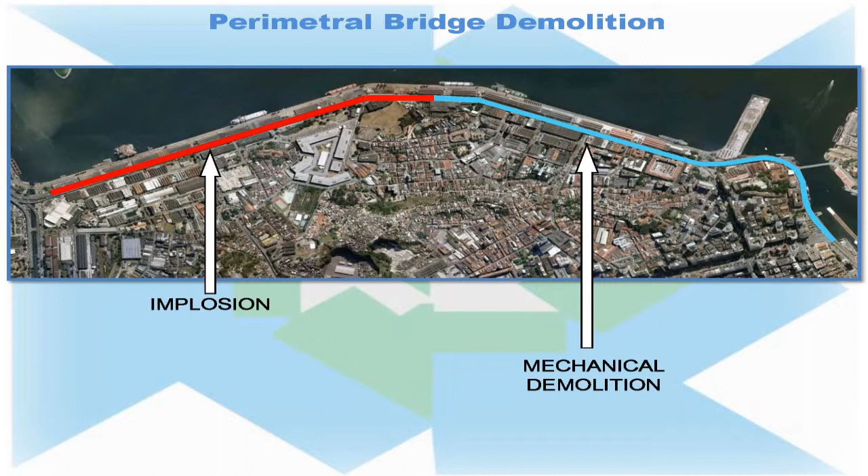This is the implosion. It's a 5-kilometer bridge, of which 2 kilometers will be imploded, and the rest will be demolished by equipment.

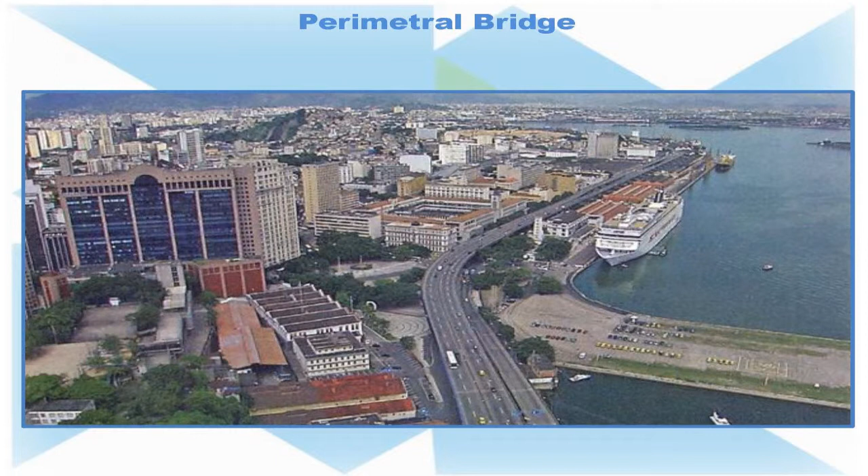It's very close to downtown Rio de Janeiro. It's also a place where ships arrive in Rio, so the mayor wants to change that view because it's a very ugly part of the city.

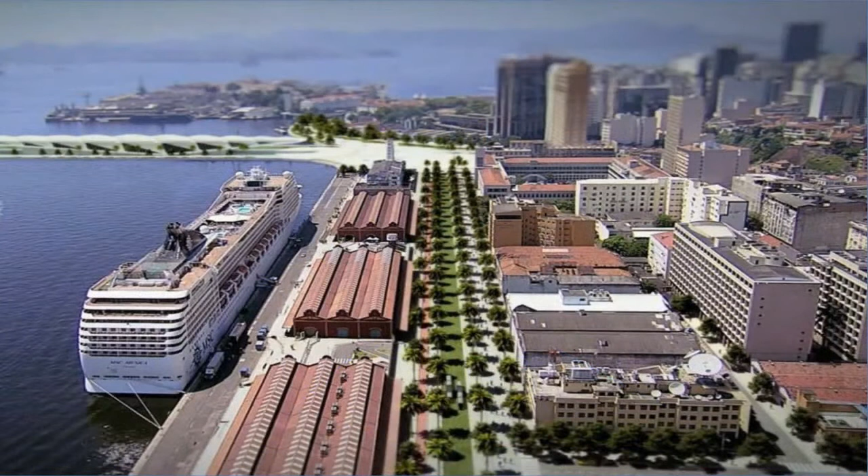This is how it's going to look like afterwards. A very clean area with a lot of spots to walk around, and restaurants and everything. So it's going to be a very nice place in the city.

The numbers of this implosion: almost 2 kilometers of implosion. We have to detonate 47 columns. We also have 384 pieces of steel beams that must be preserved. We signed a contract requiring us to preserve at least 90% of these steel beams.

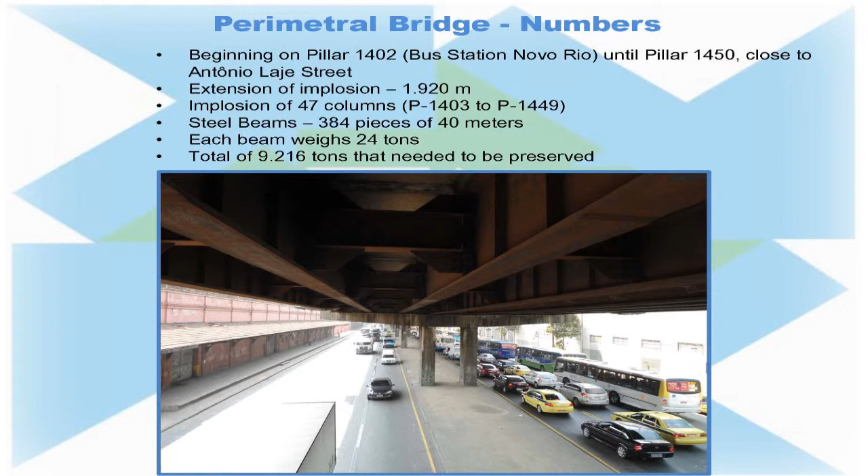It all began in December 2010 when we offered our client a price for the mechanical demolition of the whole thing. Then in May of last year, we came back saying it was possible to implode this structure, at least part of it, with a lower price than we offered, and also with a gain of time, because the traffic is still passing above and below the bridge.

So we're going to close the traffic only 2 weeks, actually 10 days, before the implosion. Because with a mechanical demolition, this whole bridge would have had to be closed already.

So they liked the idea. They said, it's a good idea, but how can we sell that idea to the mayor? Making an implosion in the middle of the city - it's not possible to just say that you're going to implode and that's it.

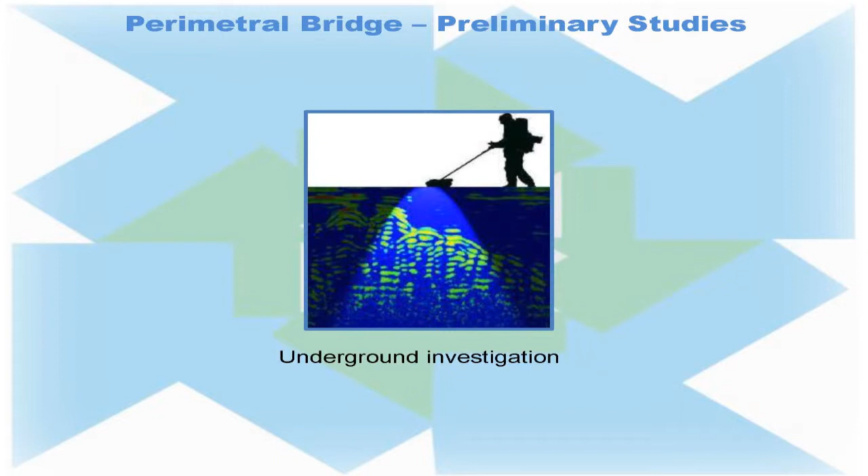So we made a study together with ASI to prove to the mayor and also our client that the implosion was possible. We began with underground investigation, because there are a lot of pipes and tubes with gas, water, and energy passing under this bridge, so we had to keep them safe and untouched.

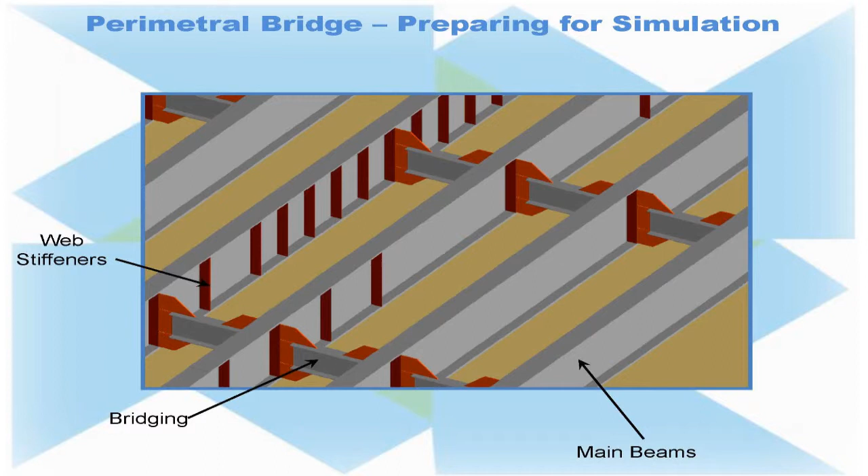After that, we sent ASI all the information they needed, such as the beams, bridging, all the concrete, the size of the columns. And they designed for us 5 simulations, 5 different scenarios at first.

With the 5th scenario, we agreed we could show the mayor and our client that it was possible to make this implosion.

Our first scenario was with no cushion material at all, just to see what happened. And we had, of course, a lot of damage in all the beams - 47% damage. That was the percentage of damage in the beams.

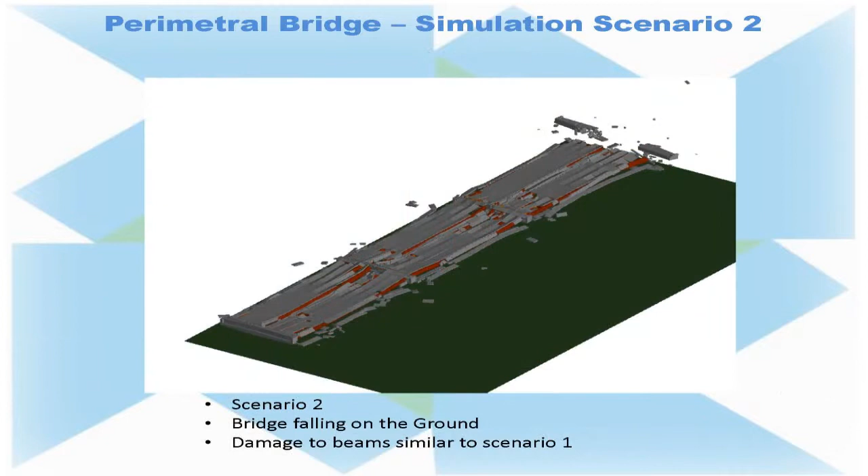The second scenario: we created a delay between the columns of half a second, just to see if that kind of delay would minimize the damage in the beams. But the damage was basically the same - we had also 47% damage in the beams.

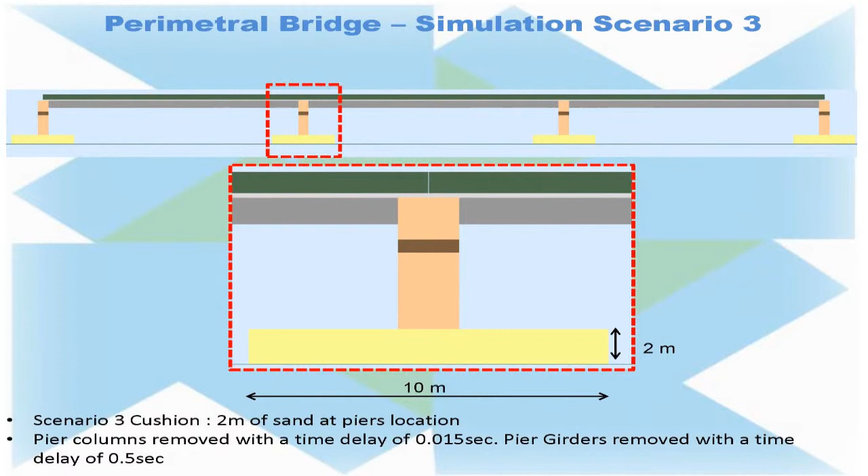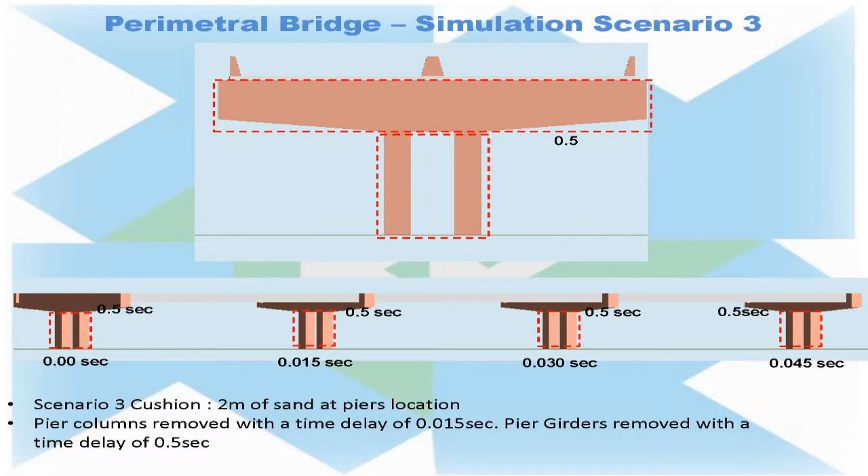Our third scenario: we created a cushion of sand, 2 meters high by 10 meters wide, placed under every column. We also made a delay of 15 milliseconds between the columns, and 0.5 seconds detonation of the concrete beam located above this column.

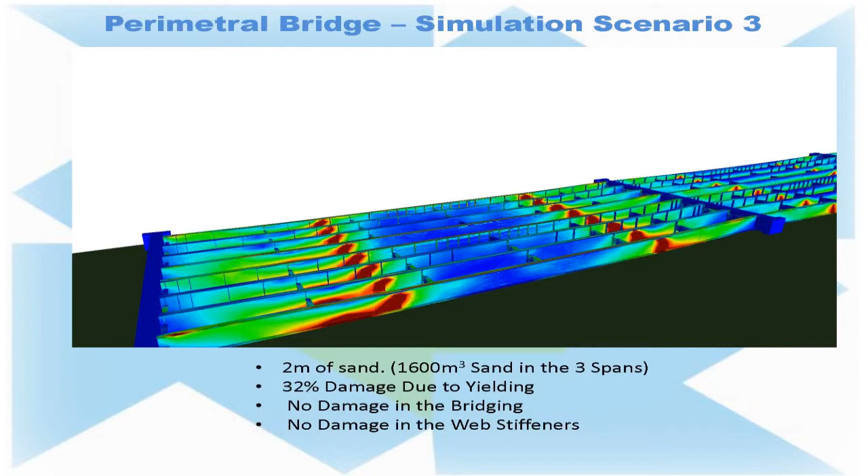We had partial damage due to yielding of steel, not tearing, but still it's damage - doesn't work. We had 32% damage in this kind. Go back.

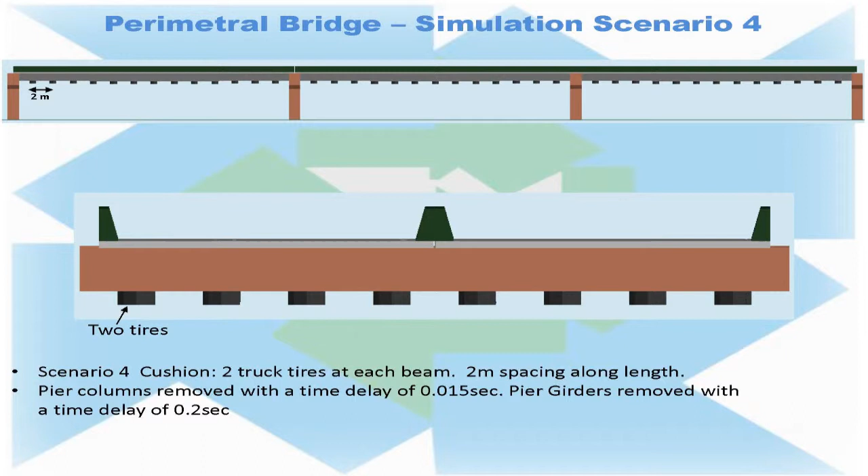The fourth scenario: we used 2 truck tires with 1 meter diameter, with a distance of 2 meters from each other, placed under each beam. We have 8 beams like that between each span, so there's a lot of tires placed on top.

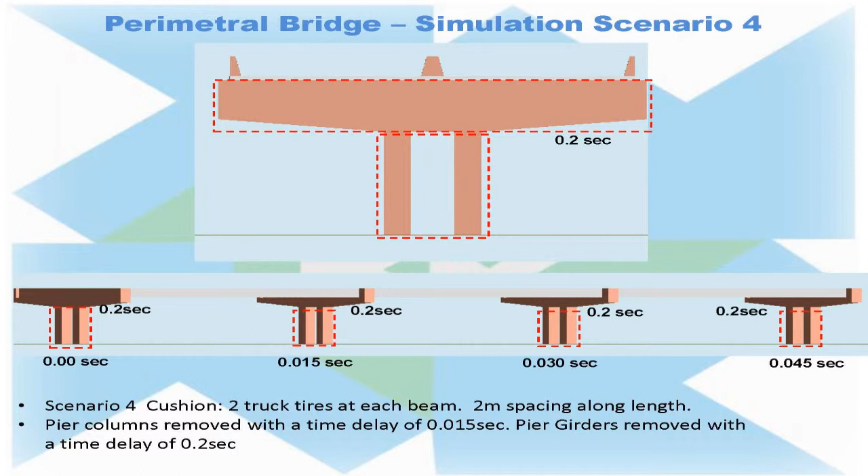We also created a delay of 15 milliseconds between each column, and 0.2 seconds between the columns and the concrete beam located above. The result was 23% damage in the beams. We're getting better, but it's not enough.

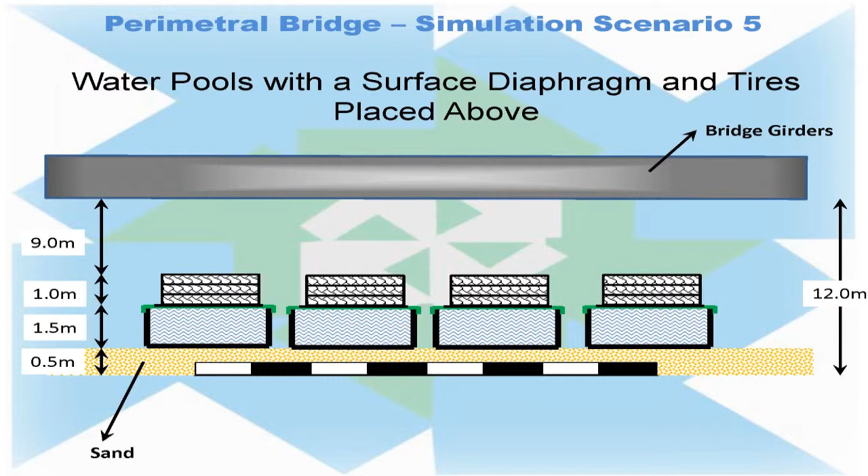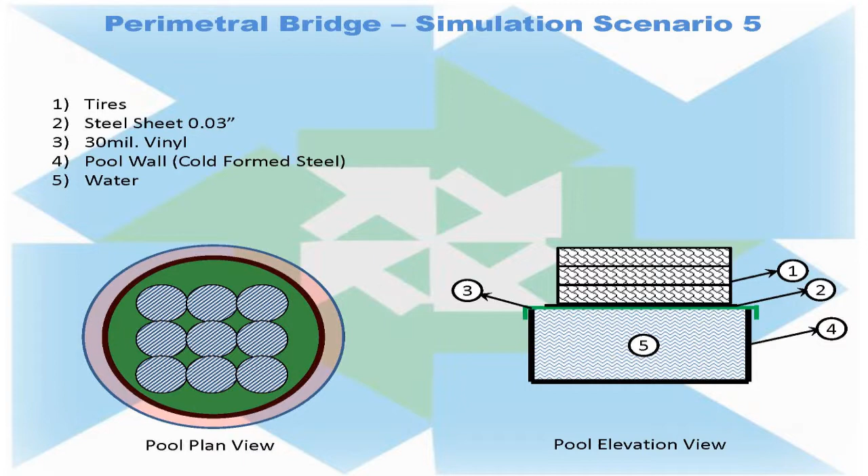So, together with ASI, we made the solution of truck tires plus water tanks working together - these are how the tires are placed into this water tank. We create 2 different energies: the first to absorb the impact, and the water to transform the vertical energy into horizontal energy. So we got the result: less than 10% damage.

With that, we could show the mayor that it's okay, we are ready to implode. This is the final simulation - the simulation of this scenario.

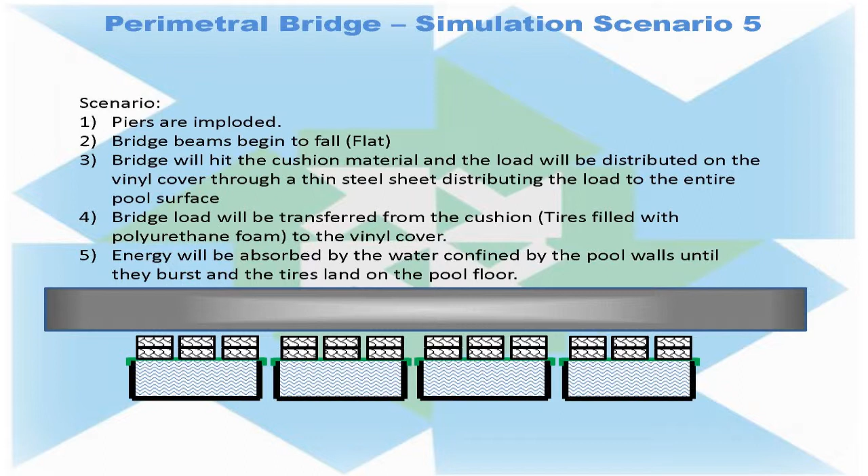This is the scenario that we showed the mayor. We also made a report with everything - all the calculations and all the necessary information about the simulation - and he agreed with that.

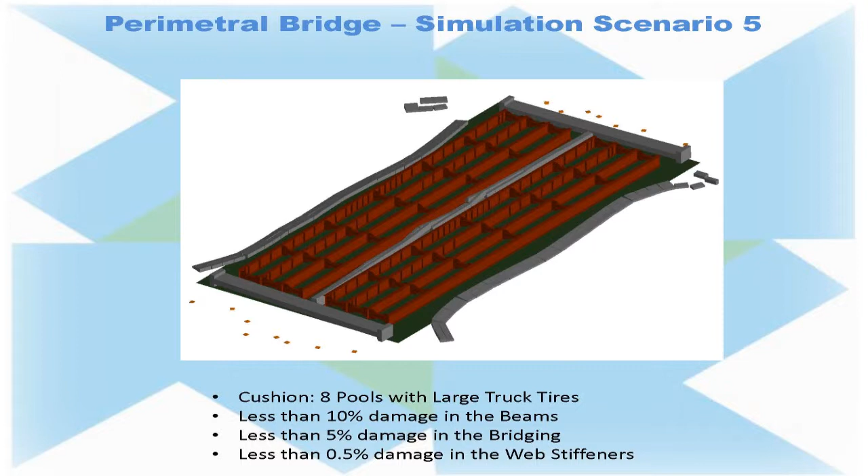So in this simulation, you only see the beams falling. This is the index summary of all these 5 scenarios that we made.

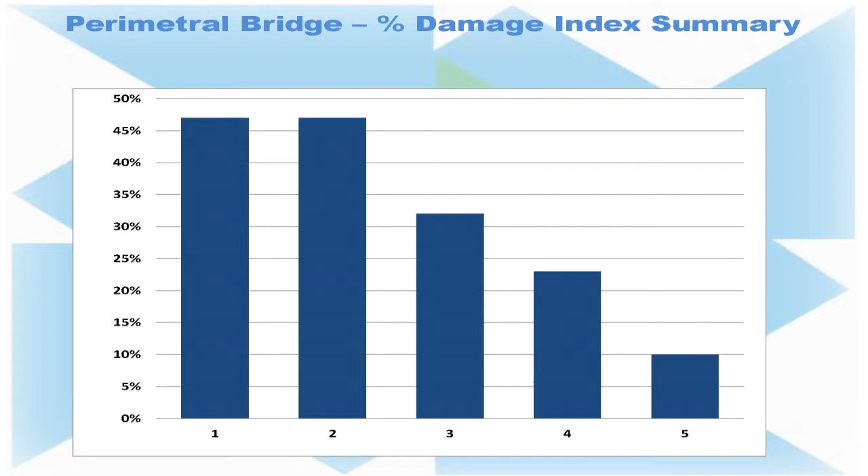After that, we had more than 35 scenarios, testing different kinds of materials, some on top, some placed on the bottom, and that one was the final scenario. This one we're going to use now on this implosion that's about to happen.

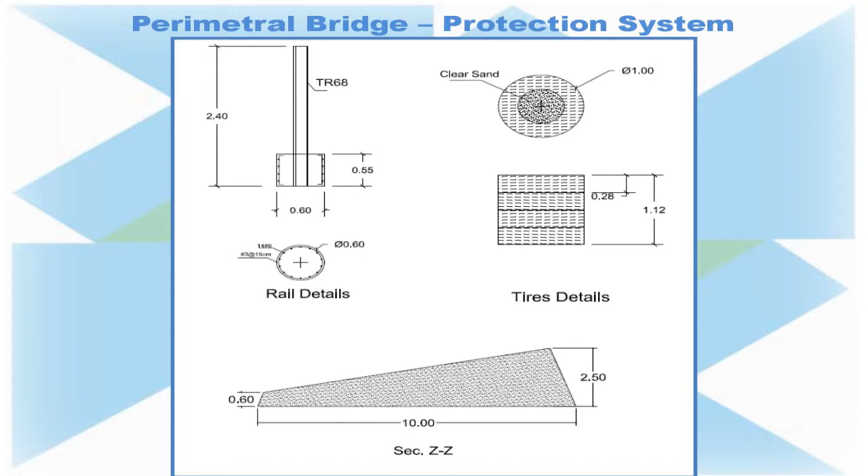So we're going to use this rail track called TR68, which is 68 kilograms per meter, place it into a concrete box, and this rail track will be placed between the steel beams. So whenever the slab goes to the ground, this rail track will hit the slab at the same time as all the tires will hit the steel beams.

So we have different forces working together to minimize the impact on the ground and also to preserve the steel beams. And at the end base, we'll have this amount of sand to minimize the impact as well.

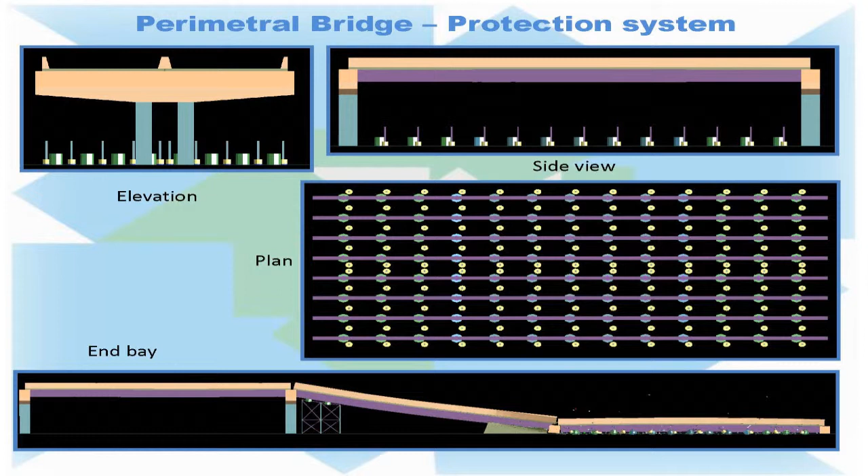This is a different view from our system. So the yellow spots in the middle, right here, are the rail tracks, which have 10 lines of those rail tracks placed every 4 meters.

And the truck tires, we have 4 tires placed one above each other, filled with sand, placed every 3 meters.

We kept the same sequence of 15 milliseconds delay between the columns, and also a 0.2 second delay on the concrete beam located above. And that is the final simulation.

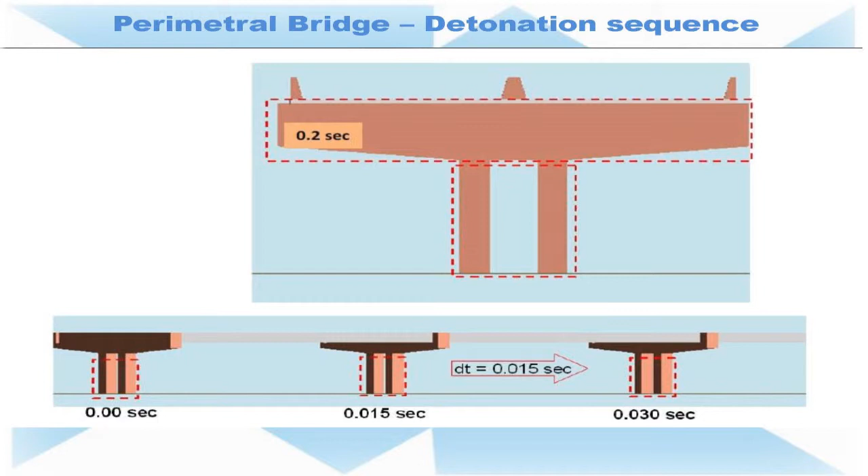That was our final video, which is now the official video for this implosion.

We call them phase 1, phase 2, phase 3, because at the beginning we had 3 phases, but right now we only have 2 phases, which will be implosion and demolition.

This end bay here, we are studying making conventional demolition on the top and just removing with a big crane all these steel beams. So it might change a little. We're still waiting for approval from our client.

So, but we still have 14 days left, right? So plenty of time.

Again, another view.

And they were deciding about splitting this implosion because we are having a lot of protests in Rio right now. Everybody's complaining about everything - if you want to build something or demolish something, there are people complaining. So they're worried about that.

So right now, we're having a meeting to decide if it's going to be an implosion of 300 meters, right where they have a tunnel to dig, and then 1 week, 2 weeks, or a month later, implode the rest, because they're really worried about the implosion between these 300 meters. But they haven't decided yet if they're going to implode the whole thing at once or just these 300 meters, which is right here.

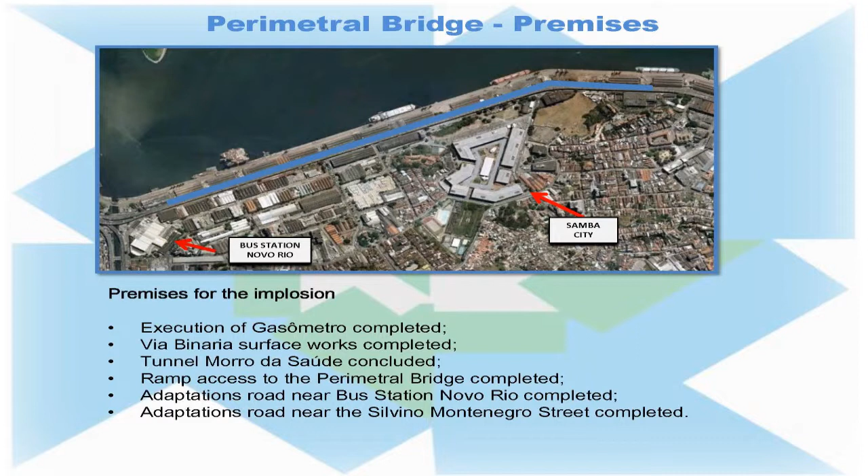So the tunnel will be right there, and also right here, we'll have a ramp to access the same bridge again.

So we have plenty of time to demolish the whole thing later on, as long as they have the tunnel started, because after the tunnel is ready is when we are going to be ready to make the rest of the demolition. And also for the demolition, they had a few things to be done, such as replacing a lot of the streets.

So we have a lot of streets around this area right here. They are ready by now, so everything is ready for the implosion.

But another thing about this 300 meters implosion is that we can close the street on the 15th, which is a holiday in Brazil. So in 2 days, we are able to make all the protection, the rest of the protection necessary for these 300 meters.

But we can't make the whole thing in 2 days. And they're thinking about making only 300 meters to make sure that this implosion will happen for sure, because with all these protests, there's a chance they stop our job for some reason. So everybody's concerned about that.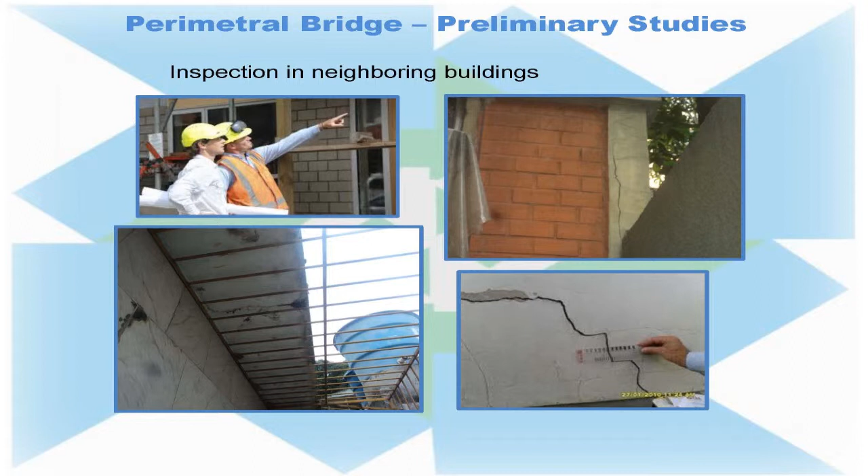We start our job taking pictures of all the buildings that are placed on the sides of the bridge. They are very old buildings, so we took a lot of pictures just to make sure that any damage is not caused by the implosion.

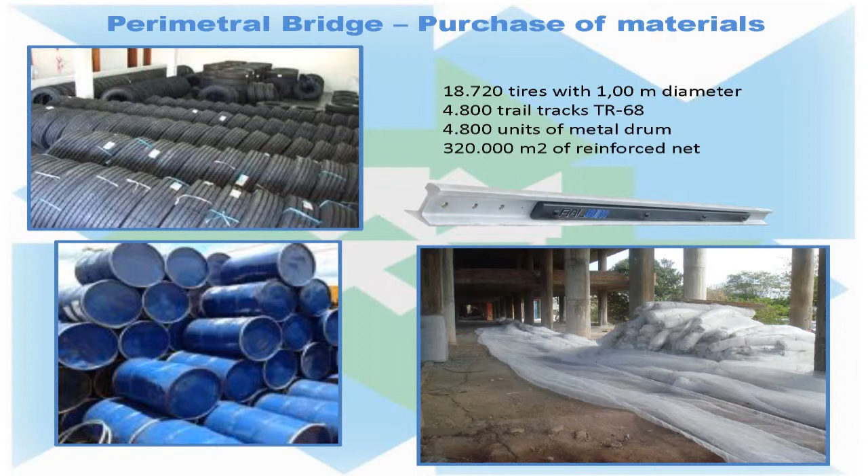We had to buy a lot of material, which were 18,000 truck tires. Some of them we had to buy brand new, some were used, but it's not easy to find 18,000 truck tires with a 1 meter diameter, so it was a really tough job.

4,800 trail tracks, 4,800 metal drums - I think that's the name of the thing, I'm not sure if that's the correct name in English. We also had to buy 320,000 square meters of reinforced net to avoid flying debris during the detonation.

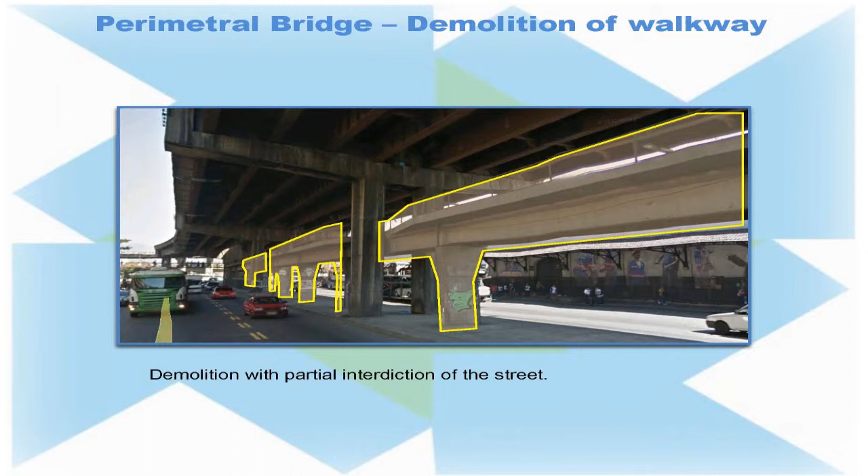We had a walkway located under the bridge, about 300 meters. We already demolished that in one night, actually on Saturday night. So we had to close the traffic to make this demolition.

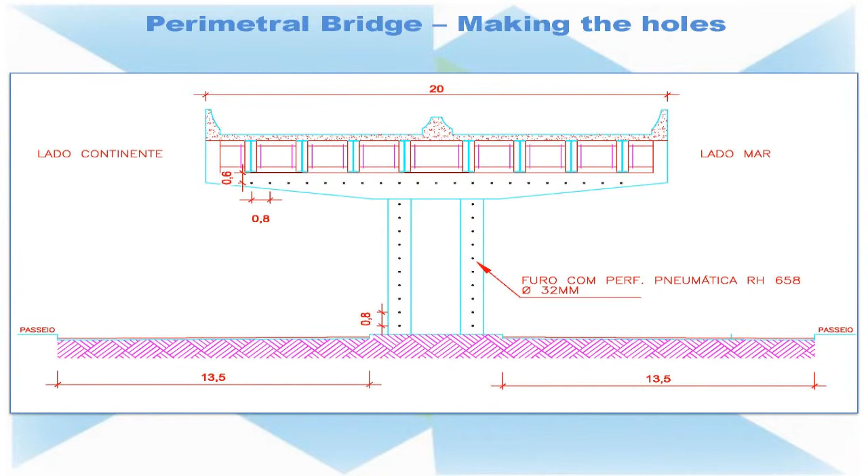We need a place to store everything. It's a lot of material, so we need to store everything in a different spot that we had to create.

Not only the tires and the trail track, but also the nets - 320,000 square meters of nets, a lot of nets, so we also needed a place for that too.

Then we start removing all the equipment, such as radar, traffic lights, traffic signs. We just left a few lights because there is still traffic passing by on the street.

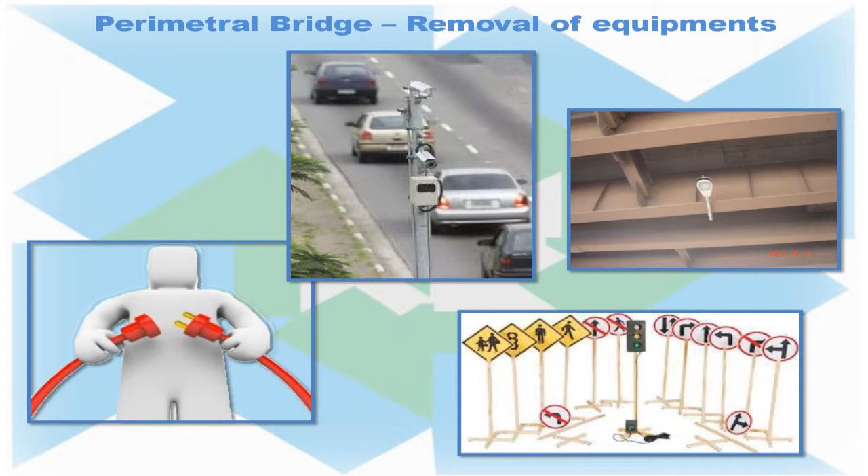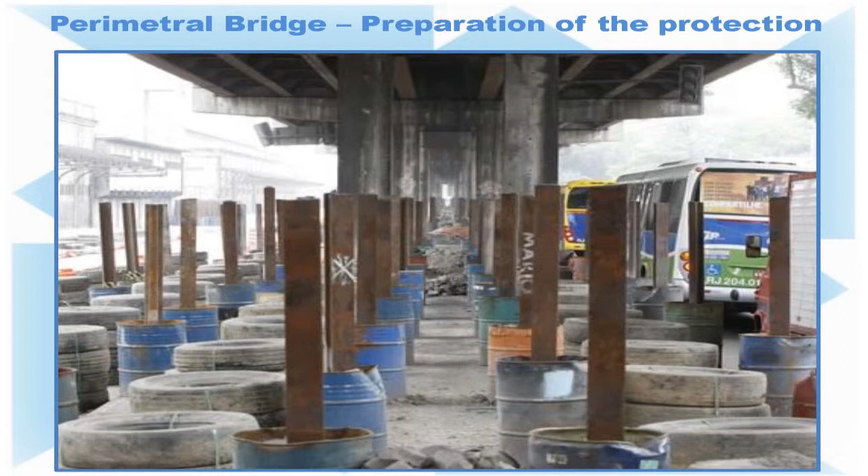It's an actual picture now. We took that last week. As you can see, on one side of the road, traffic is going by on the 3 lanes. And on the other side, we block one road - they allow us to block one road to put all the tires and the trail tracks.

So we have now 33% of the protection ready. Here's another picture showing the tires and the trail tracks.

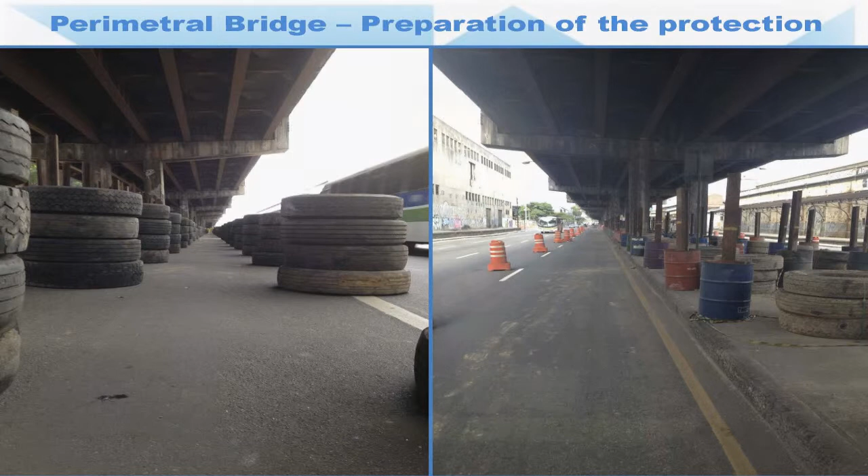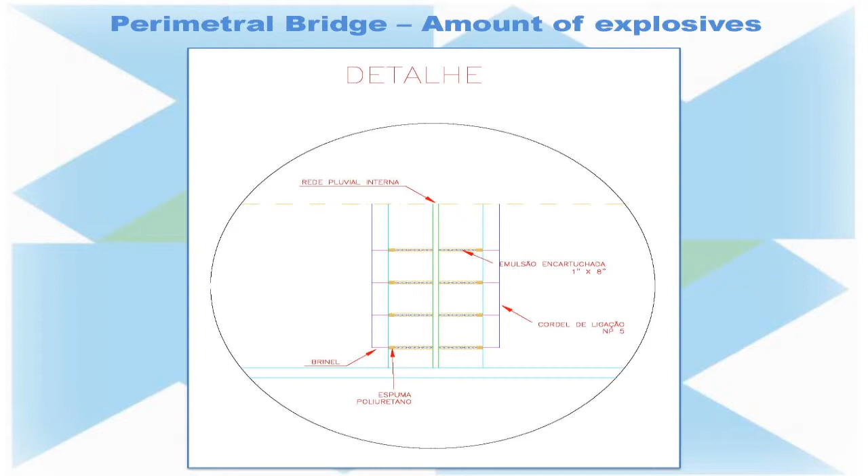And this is the amount of explosive. We had to make 2 holes coming from each side because there's a steel tube located in the middle of the structure. So we left almost 5 centimeters away from the tube, and we're going to place 4 cartridges of explosive in each side. All of them will be connected by detonating cord to make sure that all the holes are going to detonate at the right time.

We're also going to use police. This is the strongest police that we have in Brazil to make sure that we'll be in a safe place during the charging of explosive.

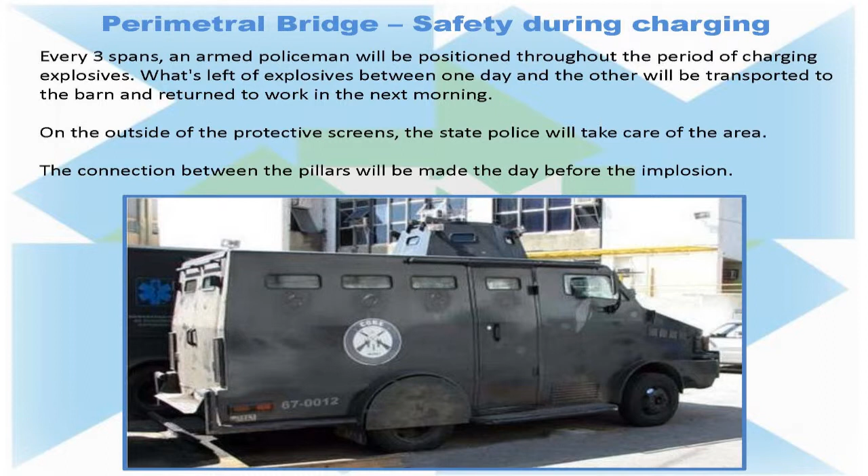We're also going to close the street. Closing, I mean, put some protection walls, really closing all the streets to make sure that nobody can get into the area.

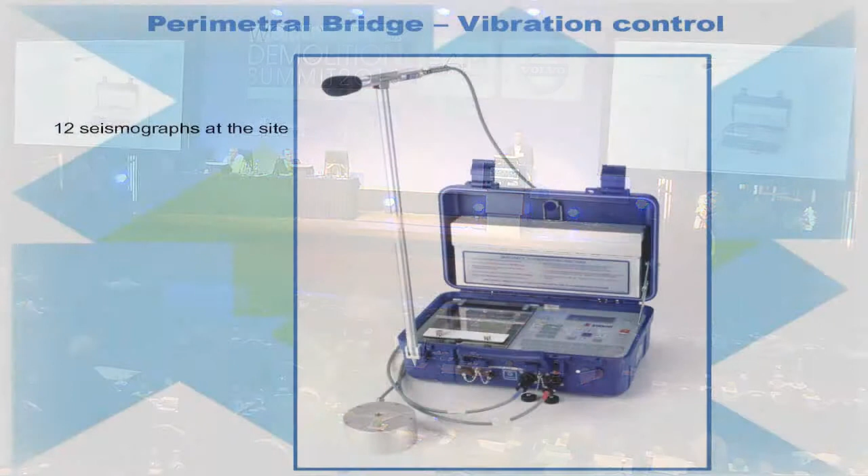We're going to use 12 seismographs at the site, placed in different kinds of buildings. And we created an area of influence: the evacuation area, which is a radius of 150 meters, where everybody must be evacuated.

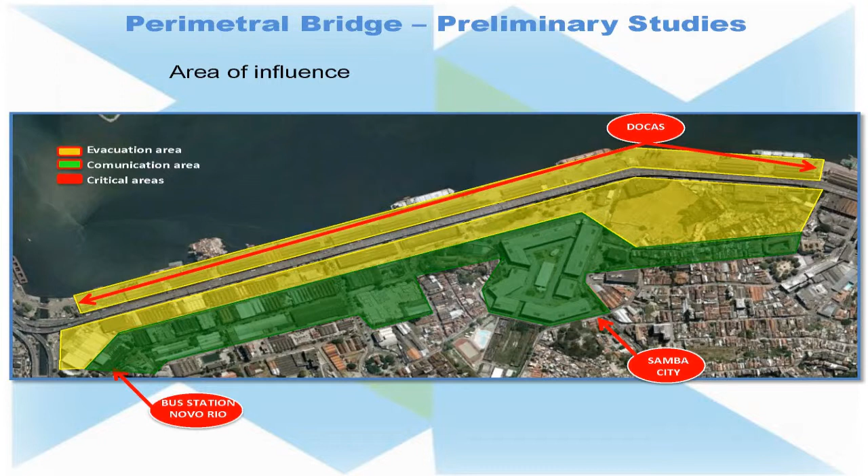A communication area, because there are a lot of commercial establishments over there, so we decided to at least inform those people over the evacuation area about the implosion. And the critical area, which covers the biggest companies around, the Samba City, the bus station Novo Rio, and Docas, which receives all the ships. There's only one bus station in the city of Rio de Janeiro, so there are a lot of buses arriving and leaving all the time, so we had to make a plan for this too.

Then we had a communication plan. It's a huge communication plan, but just to summarize, we made 3 steps. First is to see who is there, what kind of establishment we have, is it commercial, is it working, do they have direct influence or not?

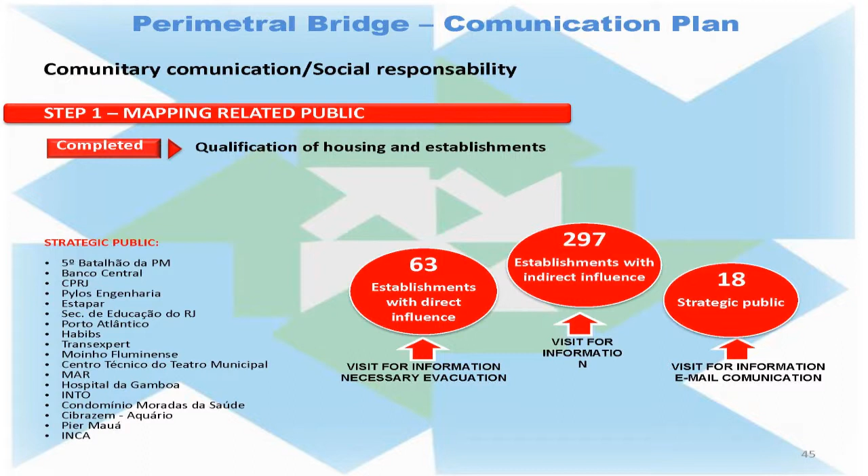Is this commercial business strategic? Because we have 18 of them, which are big companies located in this area. We consider them 18 strategic publics, and we made more than 10 meetings specifically with them.

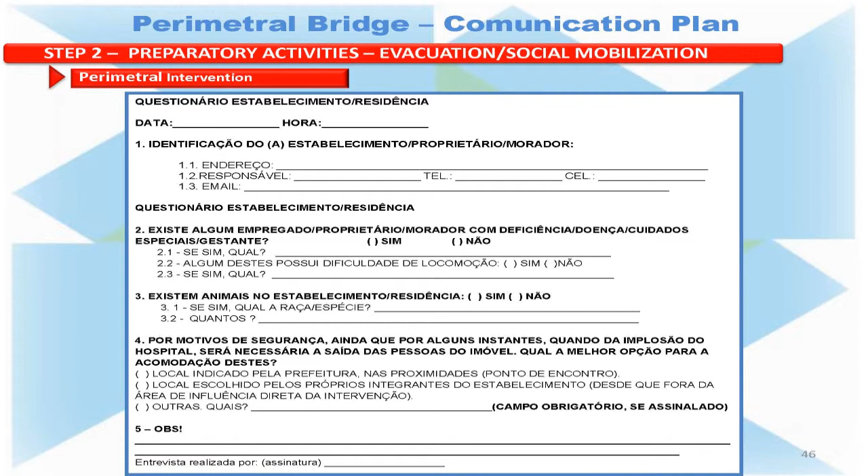We also made a questionnaire. It is in Portuguese, as you can see, but asking how many people live in the house, do they need special treatment, are you going to be in your house or commercial building during the time of implosion or not, do you have a pet, do you need some assistance or whatever.

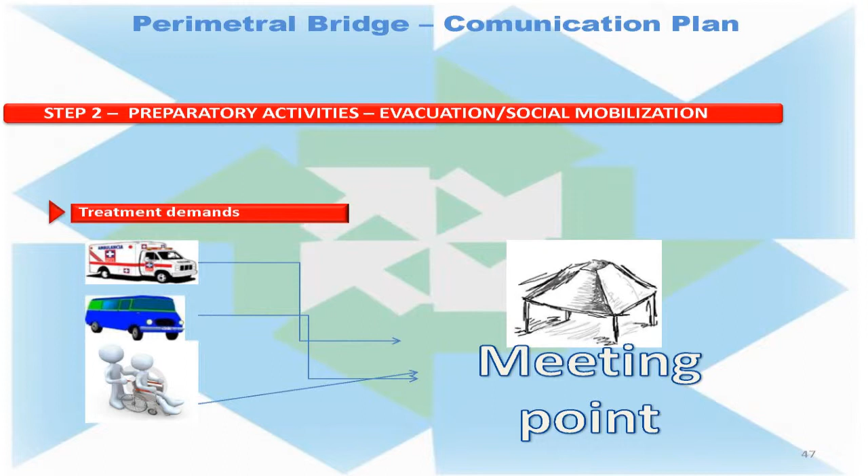So we need to put all this information together so we can be ready to receive all these people at our meeting point, to see how many ambulances we need, how many buses we need, and how many people in general we need to help in this operation.

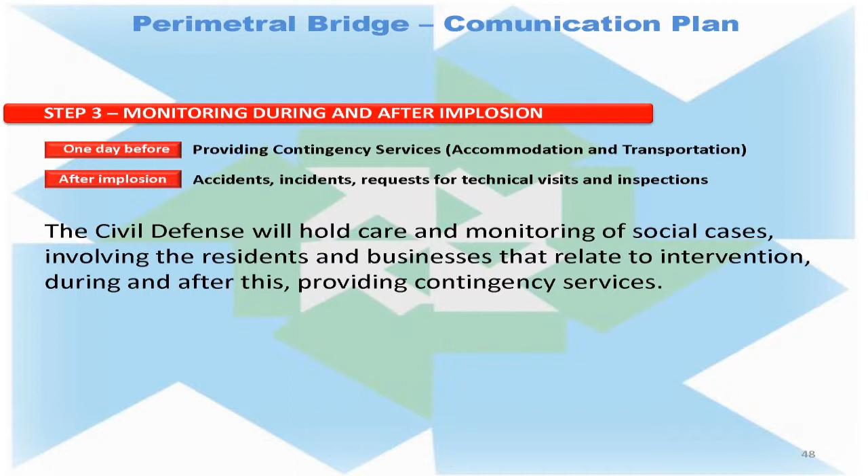Step 3 is monitoring during and after implosion. One day before, all the accommodation and transportation necessary has to be ready. After the implosion, all kinds of accidents or incidents, if they happen, will be reported to the civil defense, so they created a specific phone number just to receive that kind of calls and complaints.

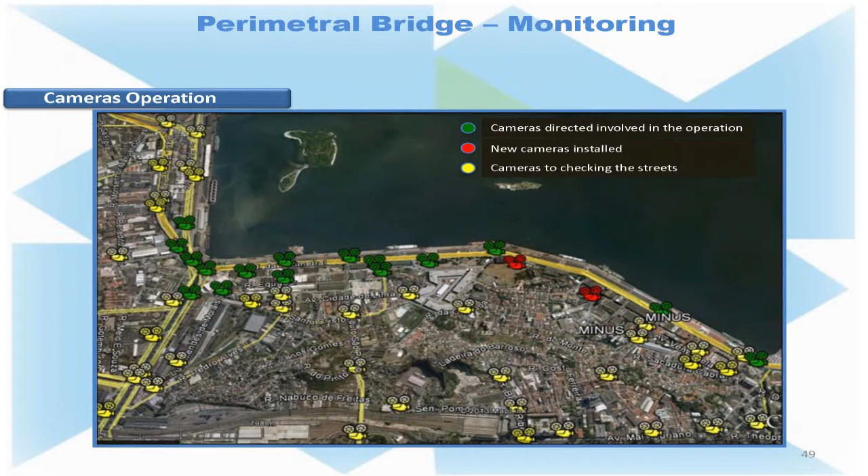We also have a room full of TVs showing all these cameras, because it's a very long bridge, 2 kilometers, so it's hard to communicate with each other only on radio. So we're going to focus on one person placed in a room full of TVs with all of these cameras. Some cameras are already used by the city of Rio de Janeiro, and some we had to install because we thought it was necessary for this operation.

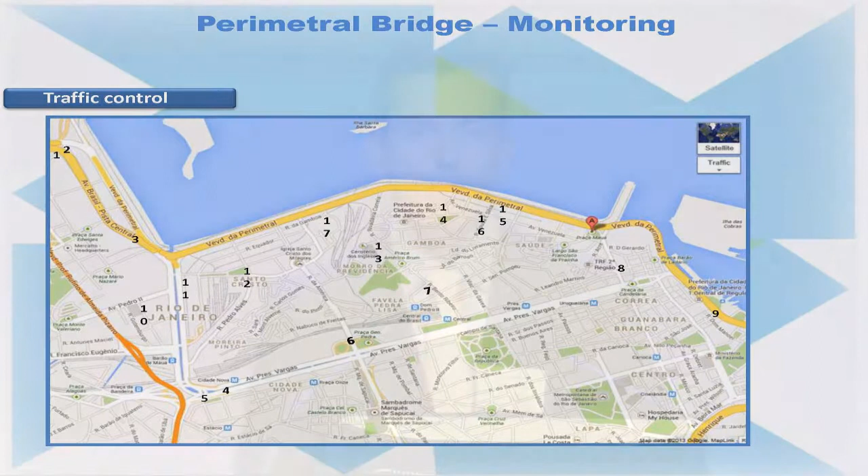We have 17 streets that we must take care of. We don't want the flow of cars to stop, so we also have to take care of this street because we don't want the traffic to stop, even during the implosion.

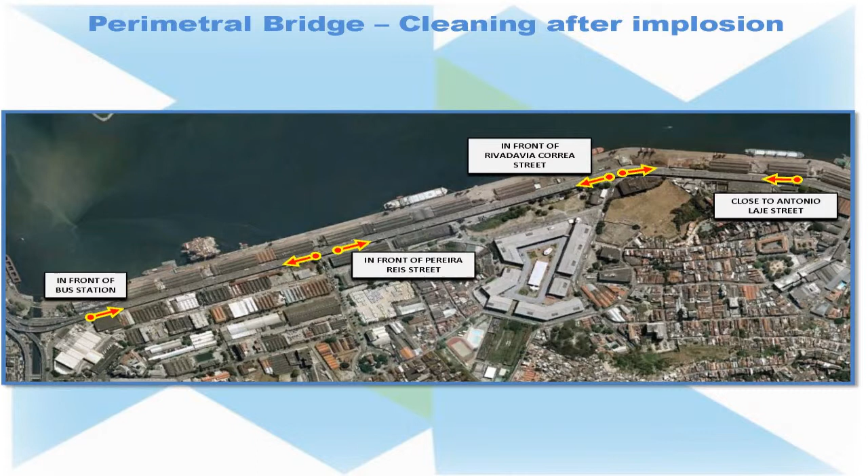Then, after the implosion is done and everything went perfectly, we'll start cleaning these 6 different spots.

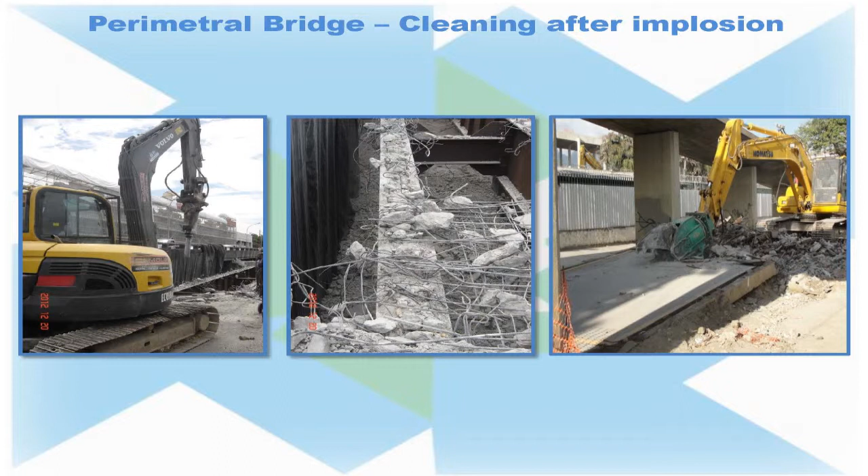We have to use a hydraulic hammer and crushers just to separate all the concrete from the steel, and also leave all the beams clean, because we have to use cranes to remove these beams.

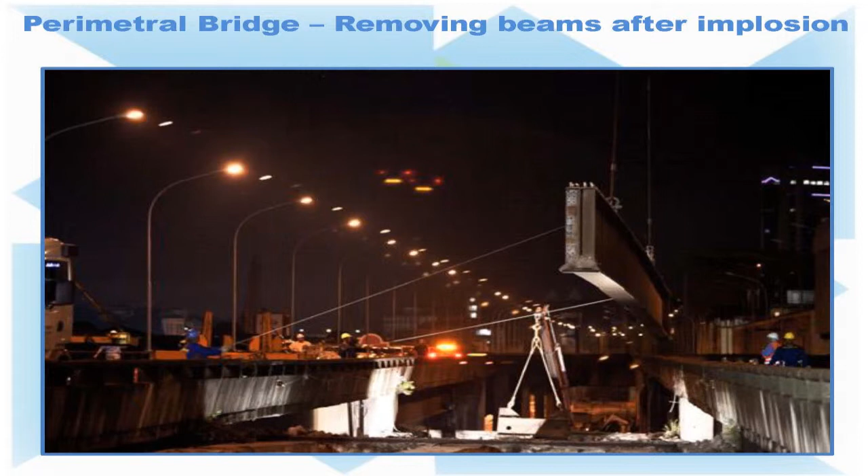This is a picture of a demolition that we made on a ramp in the same area, but we had to work only at night because we had to close the traffic to remove this beam. So at least now we know what kind of crane we need and how much time we need to remove that.

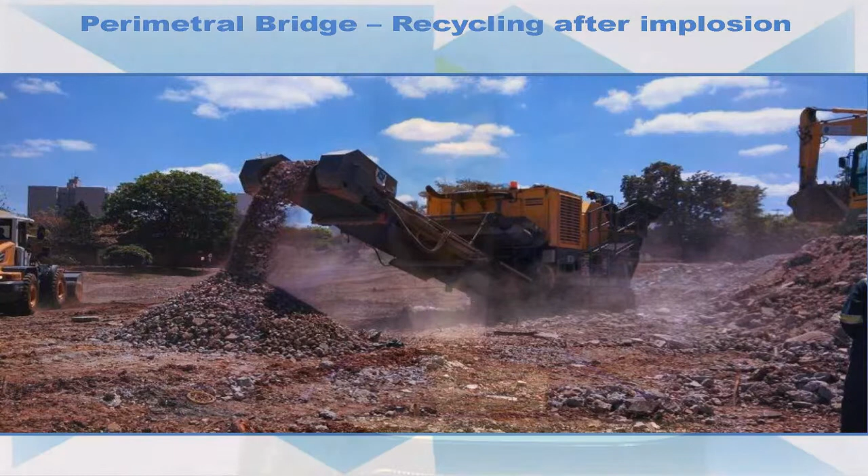And of course, we're going to recycle everything. We have our own spot in Rio where we receive all this material. We estimate approximately 30,000 cubic meters of concrete, so we'll be recycling it all at our spot, and there's a good chance most of this material will go back to the site to be reused as a sub-base.